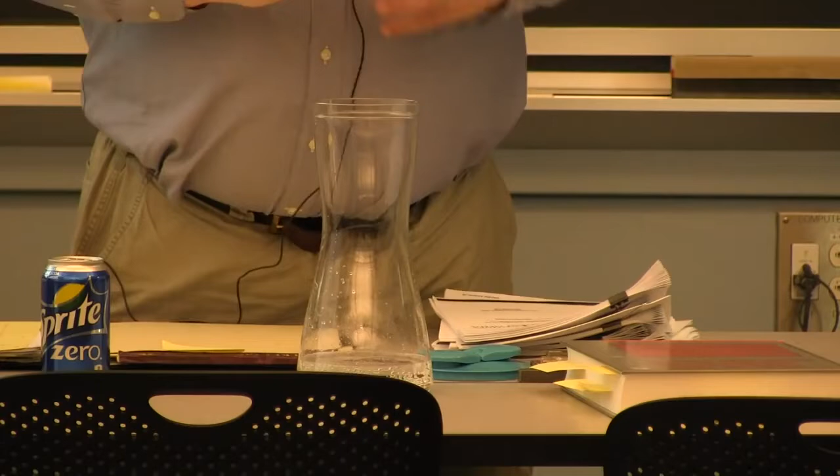Okay, so to start today, I want to take some Sprite Zero. I could have used club soda, but I wanted something that if I pour it in here, you'll see the CO2 evolve. Suds, foam -- well, not really suds, they're foam. And I want you to watch how quickly the gas dissipates.

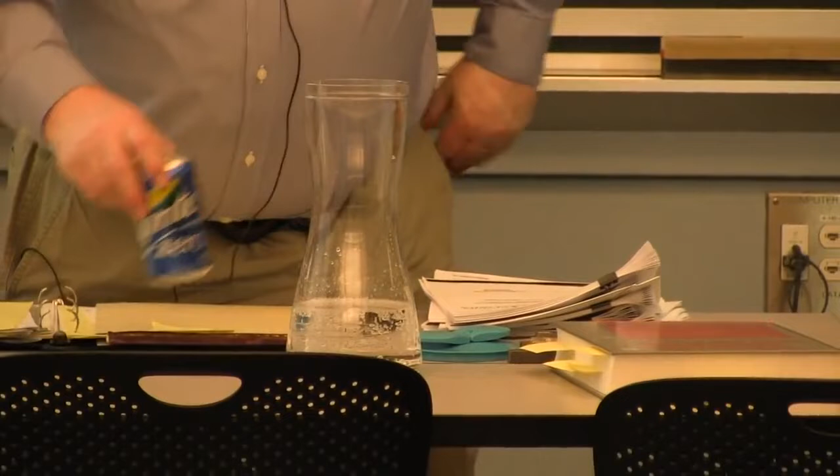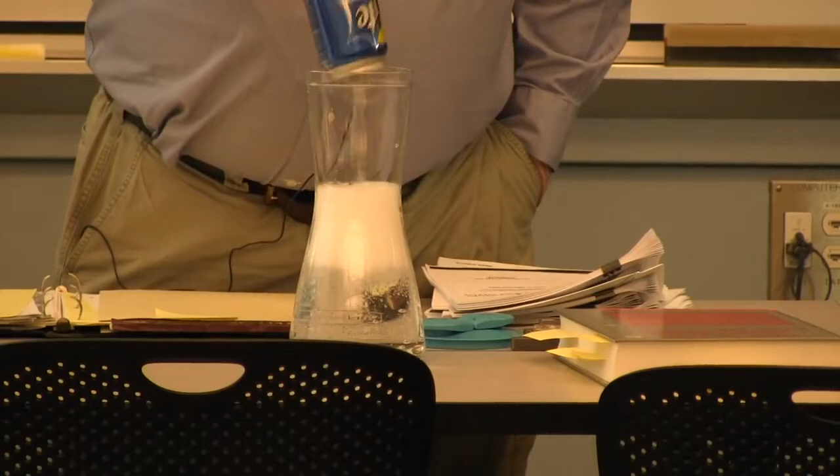We're going to talk about it towards the end of class. This all relates to -- by the way, this is sugar-free, I don't want to spill it all over the table and get everything sticky for the next class -- this relates to the Achilles heel of steel.

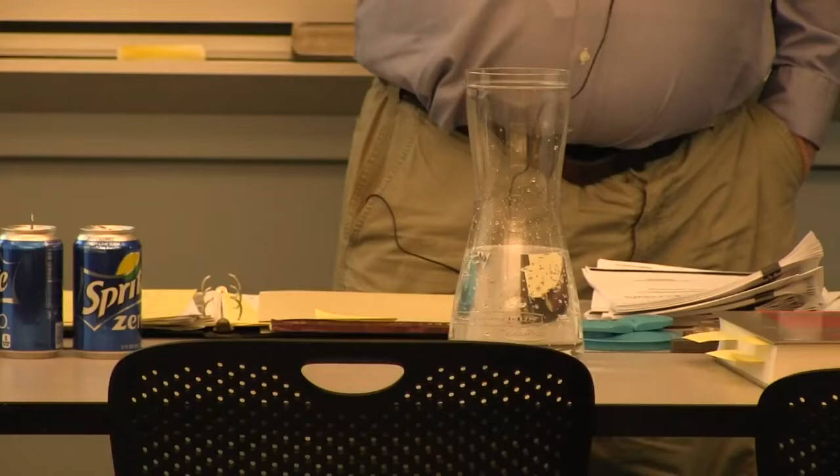See, I don't know if I ever told you the Achilles heel of steel, those of you who took the class last term. Anybody know what it is? It's called hydrogen, okay? And what you just saw, the CO2 coming out of a soda, is time-wise an almost perfect analogy for how fast hydrogen comes out of steel as it solidifies over the next 48 hours.

This will be flat and have no zing to its taste in 48 hours. You saw how fast the CO2 came out and bubbled away, and that's about how fast, once the steel starts to solidify, it's rejecting the hydrogen.

And it continues -- you see some bubbles coming up here, and you'll see them at the end of class, but there'll be fewer. We'll talk about hydrogen, but in processing of steel, there are specifications that say if you introduce hydrogen from welding, electroplating, or any other process, you have to put it in a furnace and bake the hydrogen out within 1 to 4 hours, because if you don't, you could form cracks. The hydrogen can form cracks in the steel under certain conditions.

We're going to talk about that more than you ever wanted to know, at the end of today and tomorrow. But to begin with, I wanted to show you -- you saw the bubbles, and now you continue to see bubbles, but the rate has decreased dramatically.

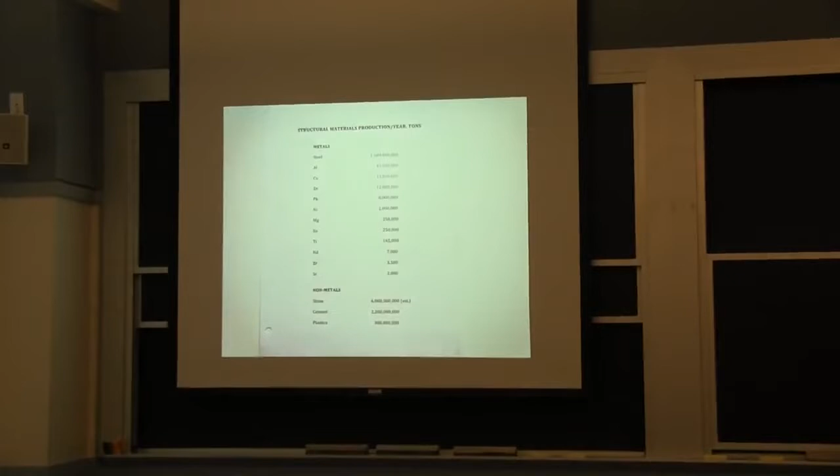Anyone remember the answer? Steels are 95% of all metals made. And if I look at tons produced per year, steel is 1.5 billion tons. The next most common metal is only 45 million tons.

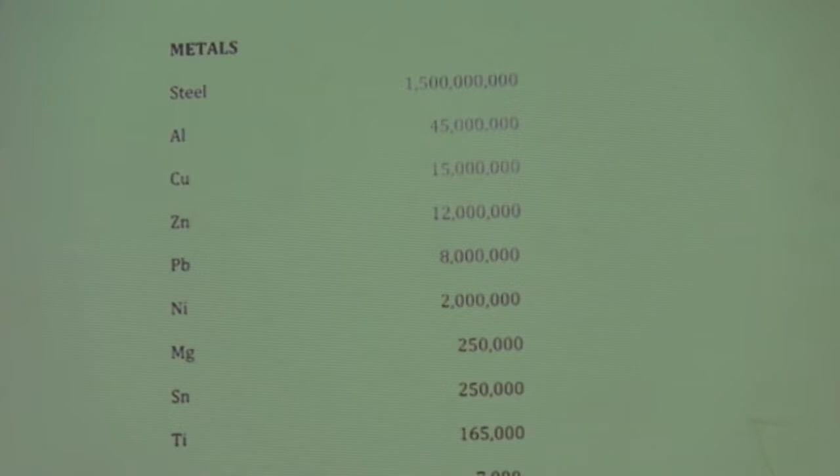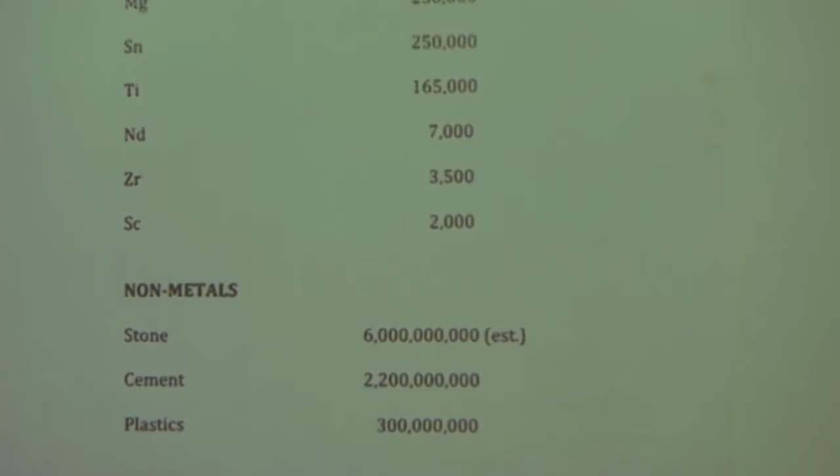If I get to other things, stone is the most - I've estimated at 6 billion tons in the world. Cement as a structural material is about 2.2 billion tons. These two are obviously more than steel. Plastics, all combined, are only 300 million tons. So the plastics industry on a weight basis is 20% of the steel industry.

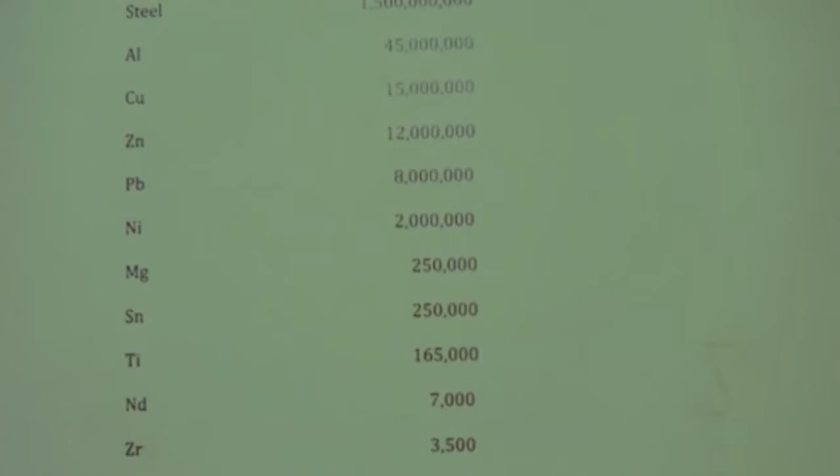So yes, we will talk a fair amount about steel because it's an important material - among structural materials, it's the predominant one. Now you can say, well, what about aluminum in automobiles? Well, they've been making all-aluminum Audis for years, 20 years. They made an all-aluminum Duesenberg in the 1930s, or a Pierce Arrow.

There's a picture I have of J.P. Morgan standing next to his all-aluminum Pierce Arrow. But those were not consumer cars like a Model T. The Ford Taurus is still made out of steel. Yeah, you can buy a $90,000 Audi - it's all made out of aluminum.

And you're soon going to be able to buy a Ford F-150 - not all aluminum, not the frame rails, those are still steel, but the body is going to be aluminum. They haven't announced the price yet; this summer they'll announce it. Anybody want to bet what the price increase will be? Let's say the base F-150 right now is about a $30,000 truck. You can add bells and whistles to get it up to $55,000, but it's a $30,000 vehicle.

Anybody have an idea? Want to guess what the all-aluminum F-150 will cost? I'll bet it's in the $40,000 base price range - it'll add a third to the price. That's my prediction. But it's going to blow away all the other pickup trucks on gas mileage.

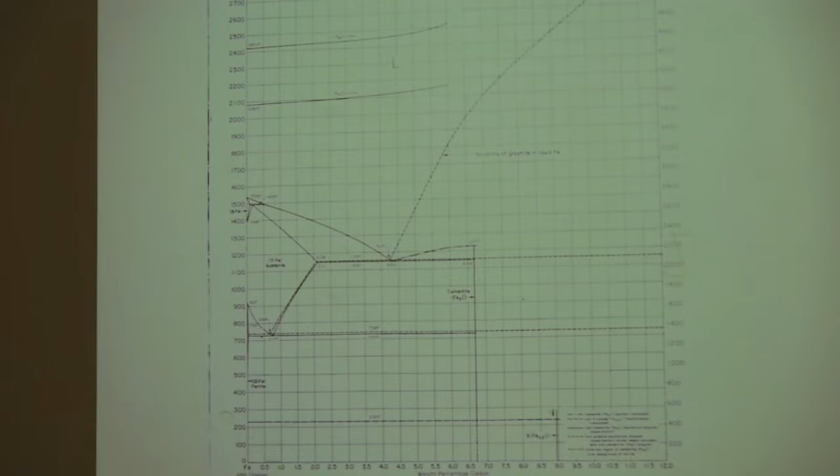I don't know how many of you understand phase diagrams, but you plot temperature versus the amount of carbon in the steel. If you look in the corner, you'll see the name of John Chipman, and our departmental conference room is called the John Chipman Room. John Chipman came to MIT in the late 1930s. He was a physical chemist from Georgia Tech, and he taught people how to make steel with consistent composition, having a tremendous impact on this industry. This phase diagram was evaluated and published by him in '72, when he was 75 years old, though he'd retired in '62.

John and I remember going as a young assistant professor to meet with John Chipman and ask him some questions when he was in his 80s. He was still working on things.

The interesting thing about steel: this is the liquid region at high temperatures above 1530 degrees C. Steels are at less than 1 or 2% carbon, and they have this region called austenite. Cast irons are also on this diagram, above about 2.5% carbon. So the cast irons are here, the steels are over here.

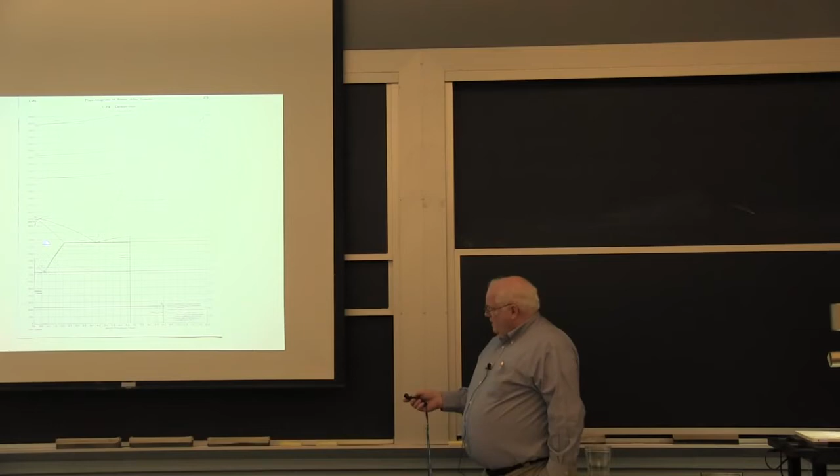One of the things that gives steels a lot of their weldability is that they transform from body center cubic to face center cubic at a temperature somewhere between 723 and 910 degrees centigrade, depending on the carbon content. Because of that solid state transformation, steels can give you very fine grain size, and very fine grain size in most metals gives you very good strength.

So it turns out I can weld two pieces of steel together and just let them solidify without doing anything special, and I'll get 100% joint efficiency. That's not true in many of your other materials, but it is true in steel, and it's true in titanium. Titanium has a phase transformation like this, and a system that gives you a crystal structure phase transformation leading to a refinement of grain size naturally will give you very good joint efficiency.

You go to aluminum, and you're going to see we have some problems getting 100% joint efficiency. What's 100% joint efficiency? You weld the bar together, pull on it, and get the same strength as the base metal. We're going to talk about whether you want the same strength, or what happens if you use undermatching filler metal, so it would always fail in the weld metal. Or do you want overmatching, and how much? It turns out you do want overmatching for good mechanical behavior reasons, but we'll get to that as we go along.

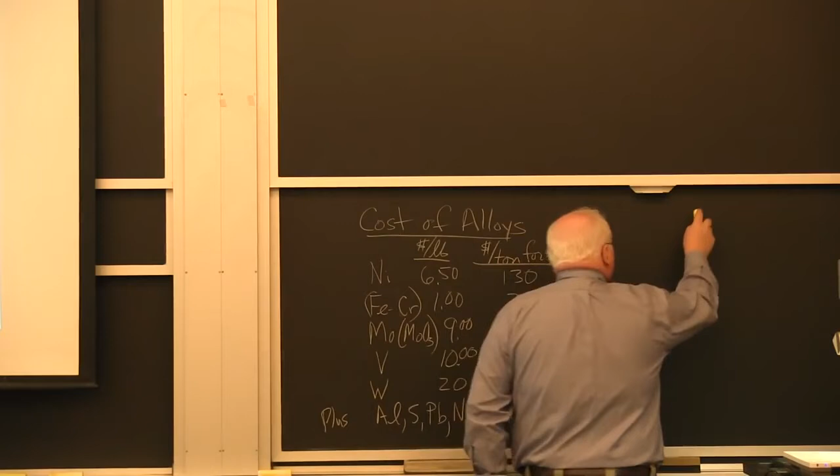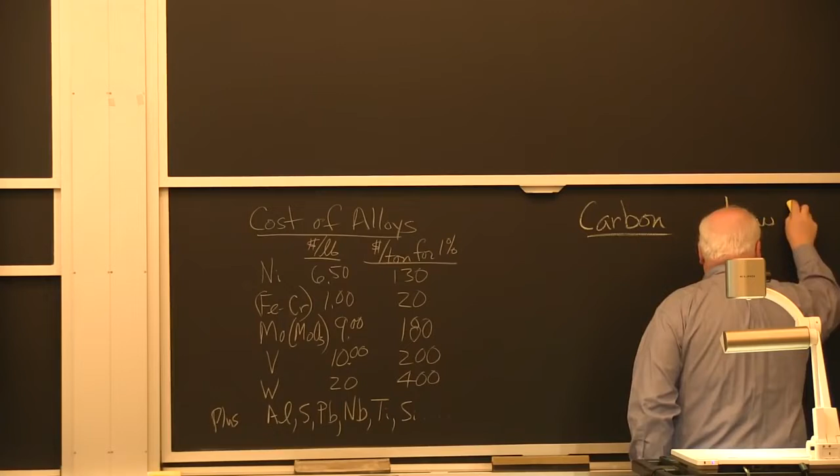This is the iron carbon phase diagram. All steels are based on this, and the steel industry, starting probably 100 years ago or more, divided steels into carbon steels and low alloy steels. Actually, they used to call them alloy steels, but we really call them low alloy now. They also have high alloy steels.

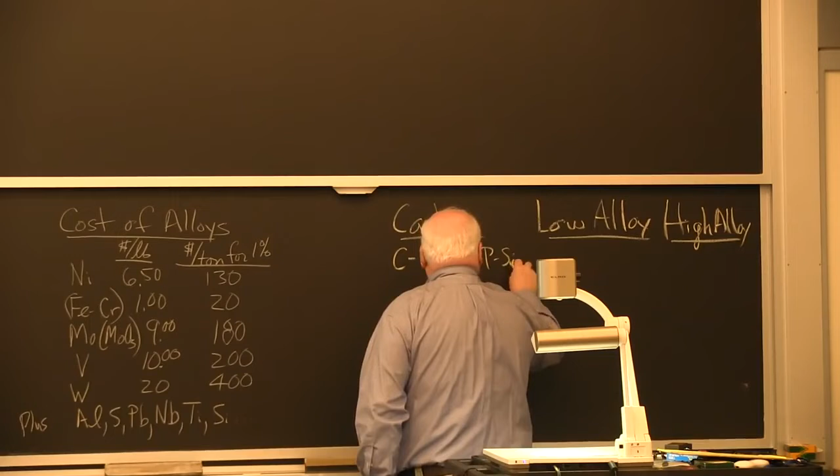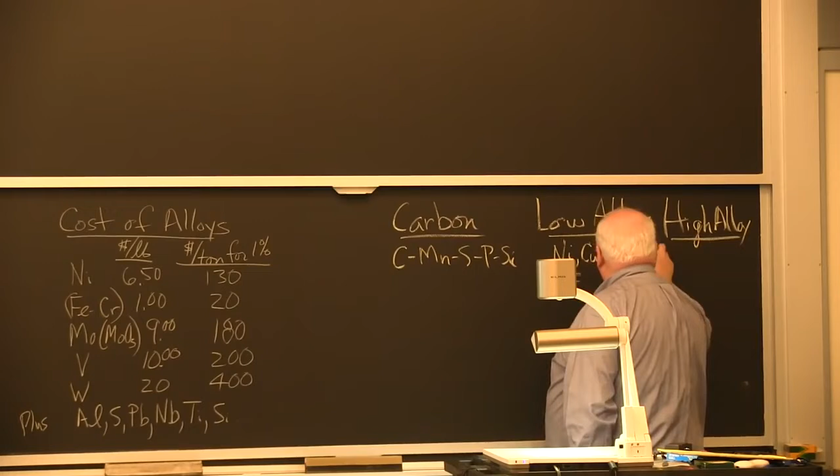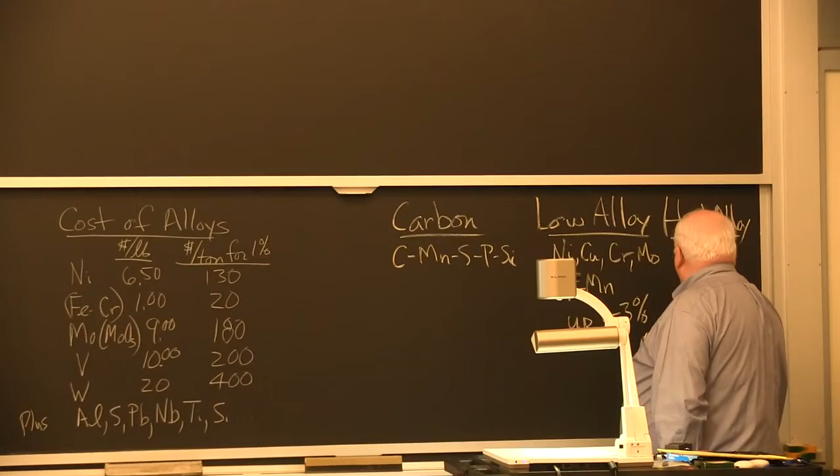Carbon steels contain only carbon, manganese, sulfur, phosphorus, and usually silicon. If they have any of these other things, like nickel, copper, chromium, or molybdenum, or high manganese above about 1.25%, they're called low alloy steels, with alloy content up to 2 to 3%. High alloy steels are greater than 4% typically. If you get high enough alloy, you get steels we don't even call steels anymore - when they're less than 50% iron, we start calling them nickel-based alloys or cobalt-based alloys.

There's an entire system, and when Mike Balforth talks about stainless steels, he'll show you a genealogy of steels similar to what I showed the class last semester.

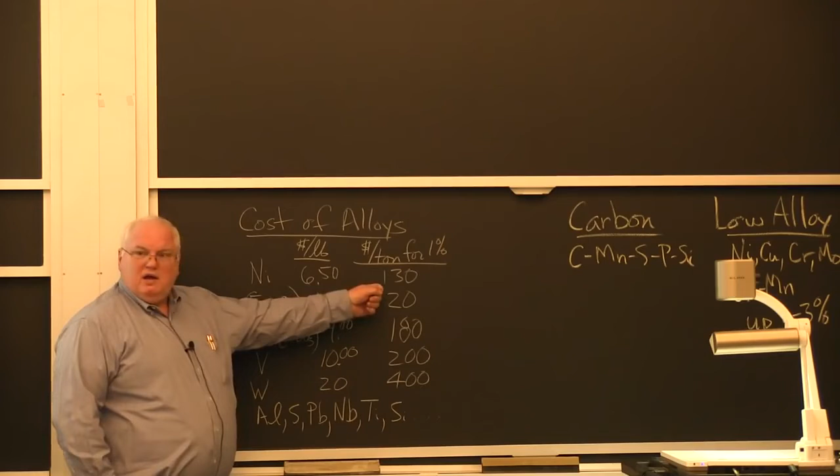Carbon steels historically were dirt cheap. They were priced differently than low alloy steels because it was much more difficult and expensive to make low alloy steels due to the alloy content. How much cost was there? If I add nickel to steel at a 1% level, I'm adding $130 a ton. What's the typical price right now if I went out to buy some carbon steel plate or bar? Anybody know what it costs per ton for a ton of steel, approximately?

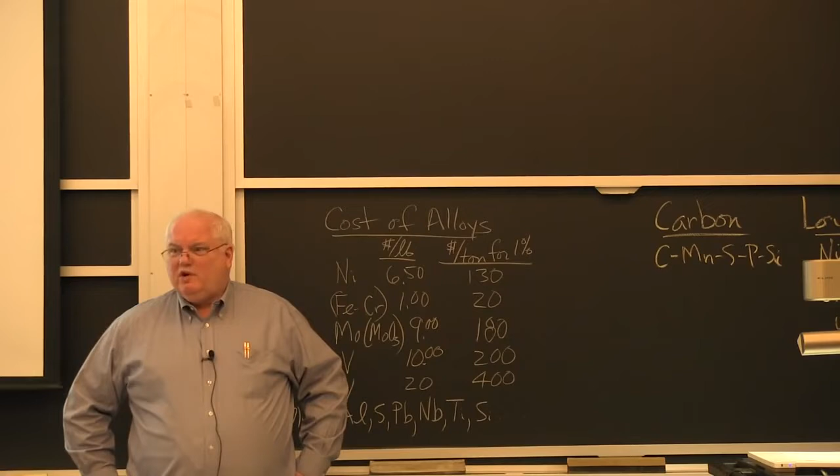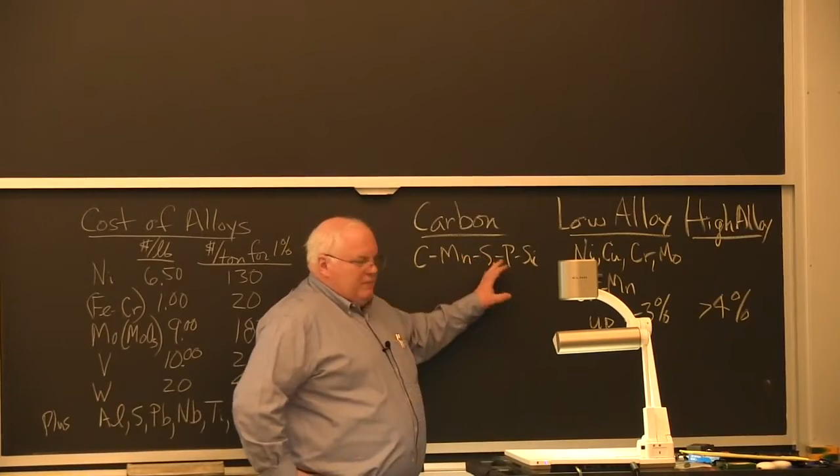If you're buying in low quantities versus if you're General Motors, you're going to be paying $400 a ton, which is about 20 cents a pound. Carbon steels right now, the cheapest bar stock is probably $400 a ton. Reasonably good quality automotive sheet might be $1,000 a ton, so that's 50 cents a pound. If I'm buying 100,000 tons, like General Electric Appliance Park where they make washing machines and refrigerators, or General Motors, they're going to negotiate prices of $400 to $1,000 a ton.

If you're talking low alloy steels, the prices can be anywhere from $800 a ton all the way up to $10,000 a ton or more. If I'm talking high alloys, you're in the $4 a pound range, or $8,000 a ton. But if you get to the nickel-based alloys, the high nickel alloys, you could be paying $30,000 or $40,000 a ton. We build nuclear reactors out of these things, out of great big thick plate, but it's not cheap.

Nuclear reactors cost - right now, what's the cost of building one? Well, you can't do it because the environmentalists will take you to court for 10 years. But if you could build a nuclear reactor, what would one cost? You're a nuclear physicist - 4 billion? 10 billion is a good number. I'm not sure, 4 billion. You'd need a very friendly country to build in. You could build one for 4 billion.

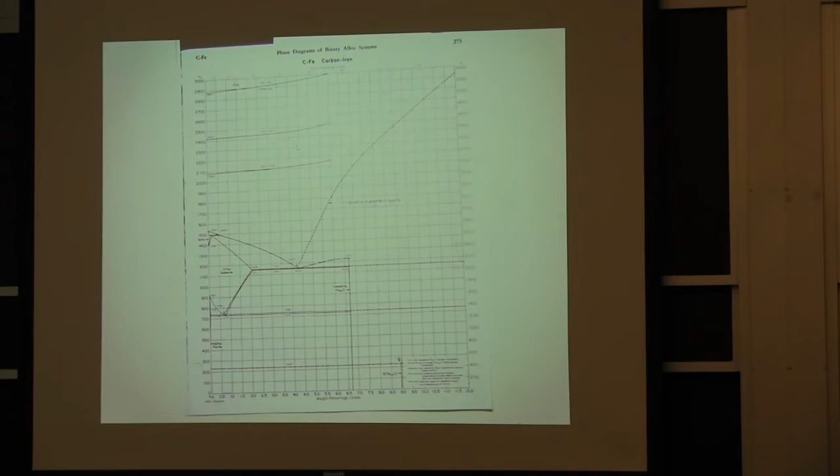That's because the steel can transform at high temperatures to this face-centered cubic austenite phase, and if you quench it, you can get a metastable phase, which is not this body-centered cubic ferrite, but something called martensite. And martensite's as hard as a file, a steel file.

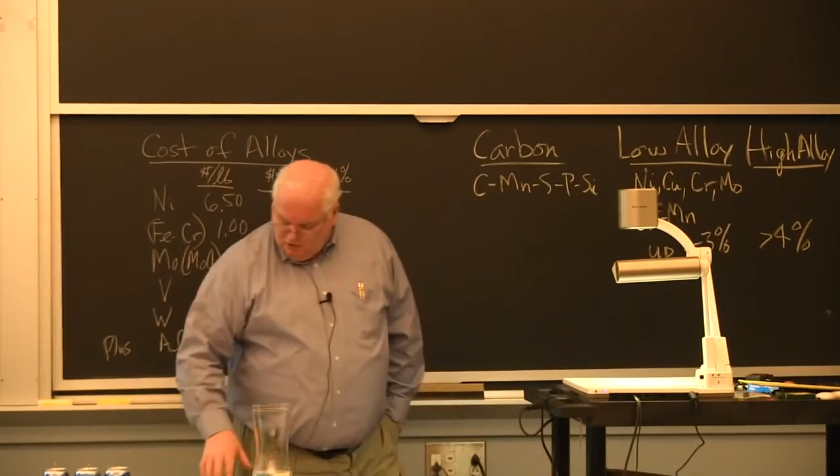So you like to have something that can be hardened. There are other alloy systems that can be hardened - aluminum, we're going to talk about aluminum, but aluminum is precipitation hardened. You heat it up and cool it down, or you quench it. You heat it up, solutionize everything, quench it, and then bring it up to an intermediate temperature - we call it aging - and you get little precipitates.

And some people will tell you that's nanotechnology. Well, the Wright brothers used nanotechnology in their engine at Kitty Hawk. It was an aluminum copper alloy that had been precipitation hardened - aluminum for lightweight, because it's an aircraft, and precipitation hardening so it had decent wear resistance. And it's still sitting in the Smithsonian today.

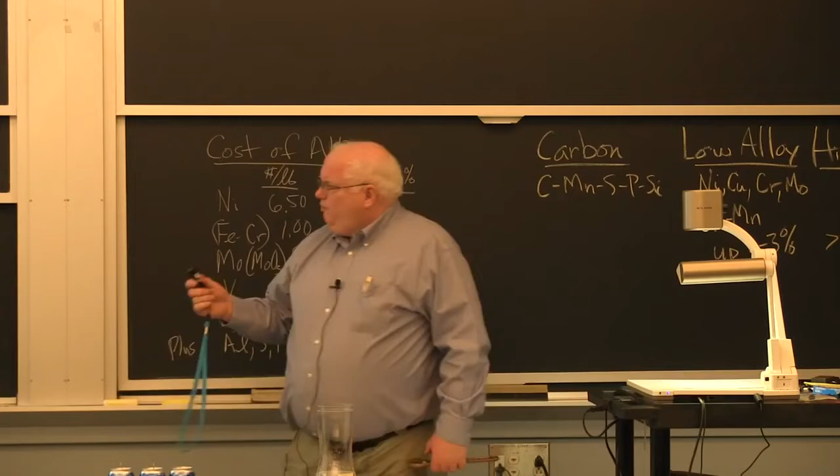Cast iron is more than 2 or 2.5% carbon - more than carbon steel - because cast iron is a eutectic. If I look at the melting point here, cast iron, you'd like to have something that is low melting to make it easy to cast.

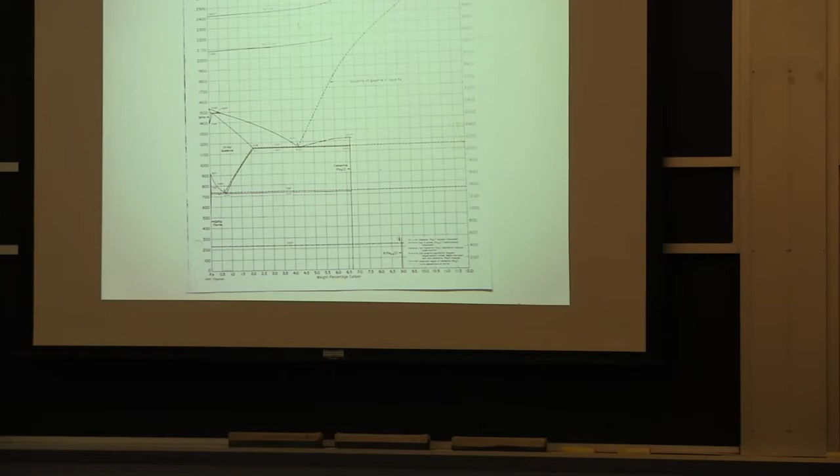Historically they call it cast iron because if you took iron ore, where you didn't necessarily want carbon, you would mix iron ore with coal, or originally, up at Saugus Iron Works, they mixed it with charcoal, which is carbon, just a wood source of carbon. And when you do that and try to melt it,

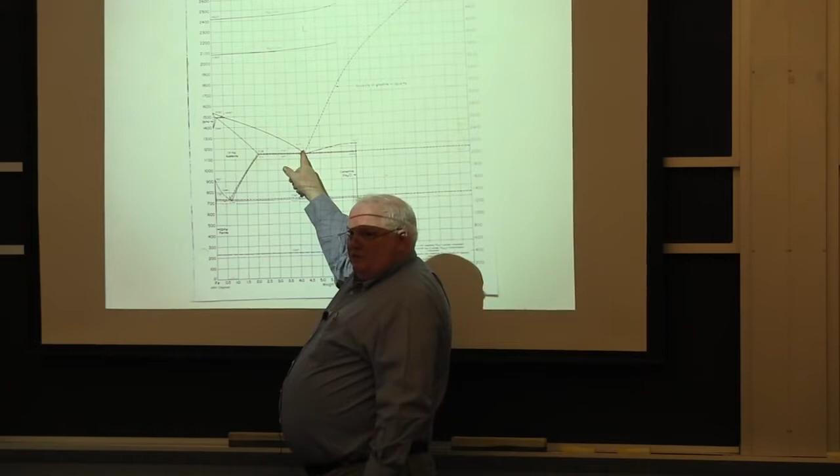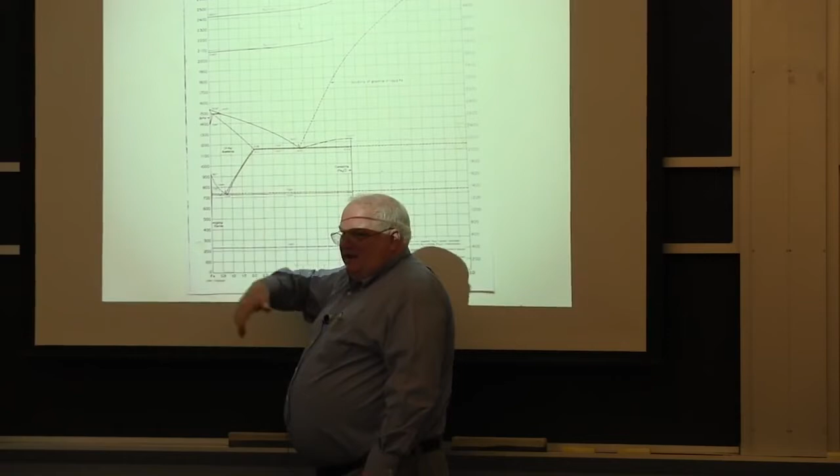the carbon will alloy with the steel and form cast iron. So in the 1600s, they didn't have the phase diagram, but it was cast iron that melted at a low temperature. They then could take that cast iron and beat it, forge it, heat it up. That's the blacksmith folding it over and making swords and stuff. As he did that, the carbon would burn off the surface. If he did it enough, burned off enough carbon, he would get something even more malleable, more ductile, that was wrought iron rather than cast iron, because he had wrought it on the forge. And if he did it long enough and didn't oxidize it all the way to nothing, he would end up with steel.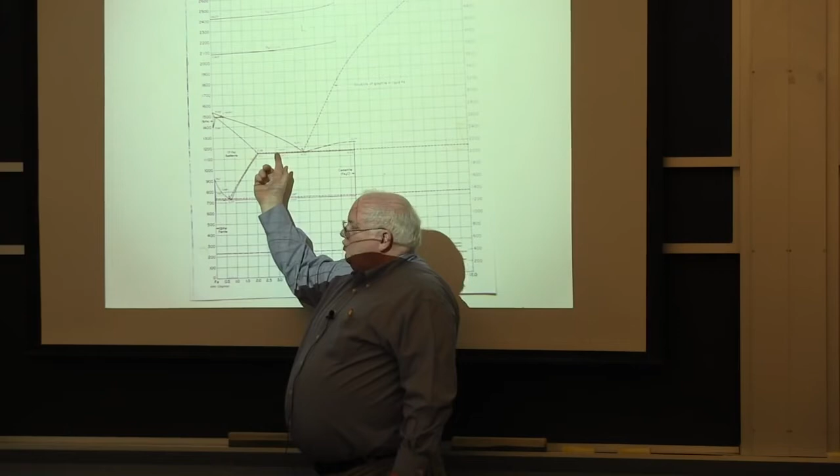So historically, they would take iron ore, reduce it with carbon, and end up with cast iron. Then they would sort of work their way back across the diagram, and if they're lucky, they could end up with little bits of steel, which were tremendously expensive - all that work that went into things.

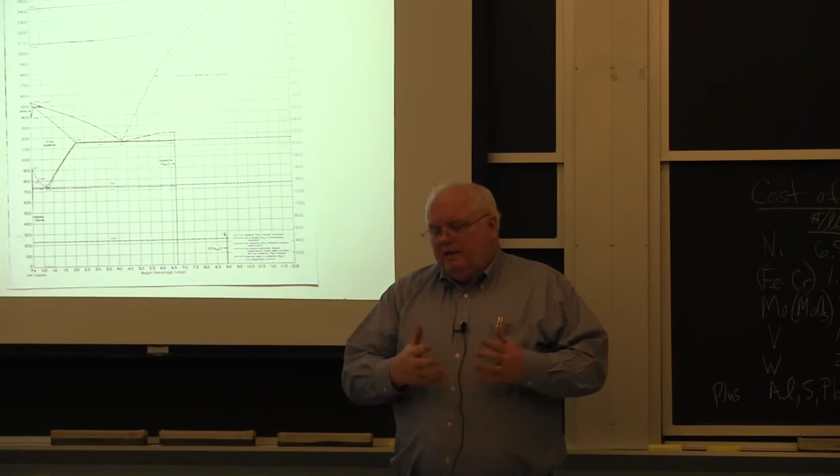I've estimated the person-hours per ton in the 1600s was about 2,000, maybe 3,000 person-hours per ton of cast iron or wrought iron. Well today it's about 20 minutes a ton. Look at that productivity gain.

And what was the big productivity gain? It was 1856 - Sir Henry Bessemer taught us how to build a vessel so we could burn the carbon out of the cast iron more efficiently without oxidizing all the iron back to the ore. That was the beginning of the Steel Age in 1856.

And who was the Bill Gates of his day, the richest man in the world? Carnegie, Andrew Carnegie. In his day, he was richer than Bill Gates or Warren Buffett, on a proportional scale. And it was all because of the railroads and steel.

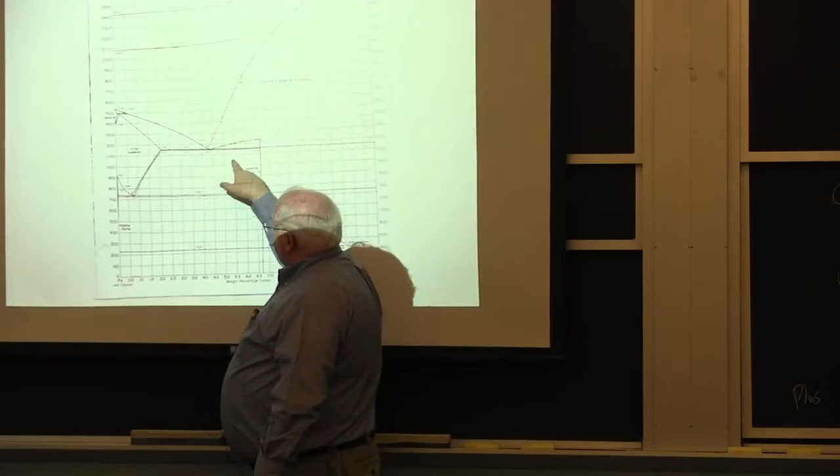So there are certain things that came along, but the reason it's called cast iron is because that's how it was made originally. You take charcoal and iron ore, reduce it, and you end up with cast iron, which is right here on the diagram. All the cast irons are somewhere around this, about 4.3 or something. But you can have cast irons down here, you can have cast irons up here. You don't go above 5 or 6% carbon in cast iron because you run into other problems.

To tell you how it happened - in the United States we had some iron ores that were very low in phosphorus, so we could make good steel. In Czechoslovakia, a lot of the Europeans, the Czechoslovakians, were some of the best steel makers in Europe. But the Czechoslovakian iron ore had a lot of phosphorus and sulfur in it, and they couldn't get consistent results. It wasn't until John Chipman came along in the 1940s that really taught people how to get consistent results.

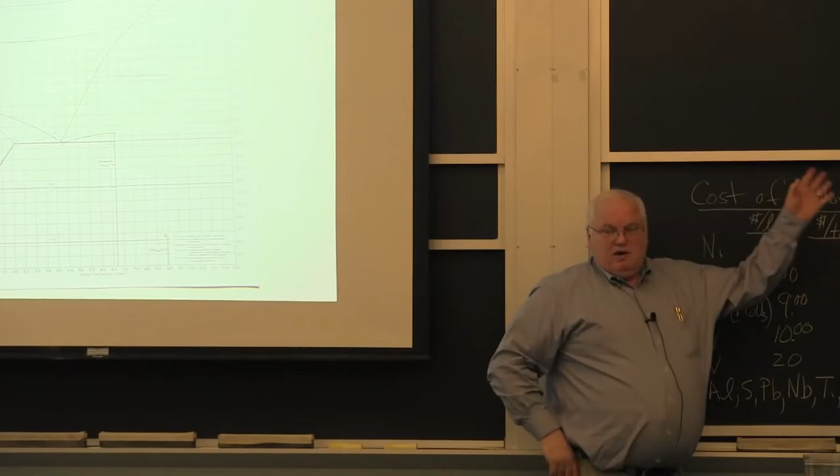But you don't just take iron and carbon and put them together. You put them together with a flux, and that flux might be limestone, or calcium silicate, which geologists call wollastonite, just a rock. They might throw sand in there too. So they throw these different things into the steel when they're making the cast iron, which you're then going to turn and burn the carbon off to make steel out of.

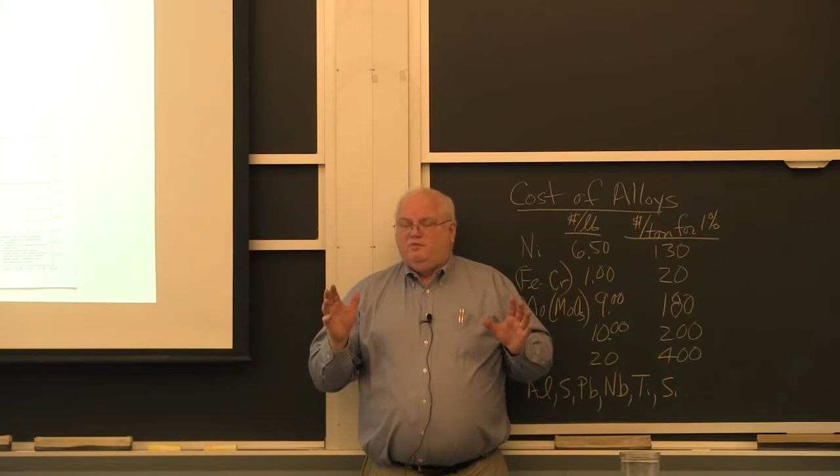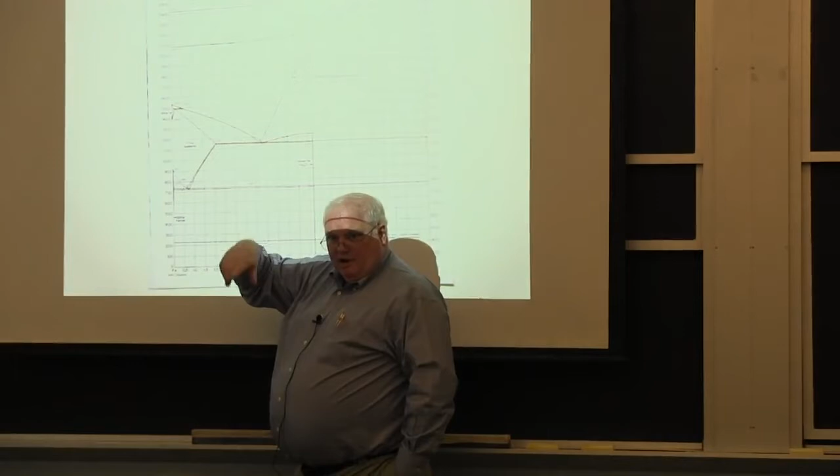But if you have very much silicon, or very much sulfur, you've got a real problem. Because if I had the iron-carbon or iron-sulfur diagram, the iron-sulfur diagram has a really deep eutectic with the sulfur. Remember, sulfur is right underneath oxygen on the periodic table. Here's your eutectic with carbon - the eutectic with sulfur is an even deeper eutectic, below the hot working temperature where you're going to forge that steel.

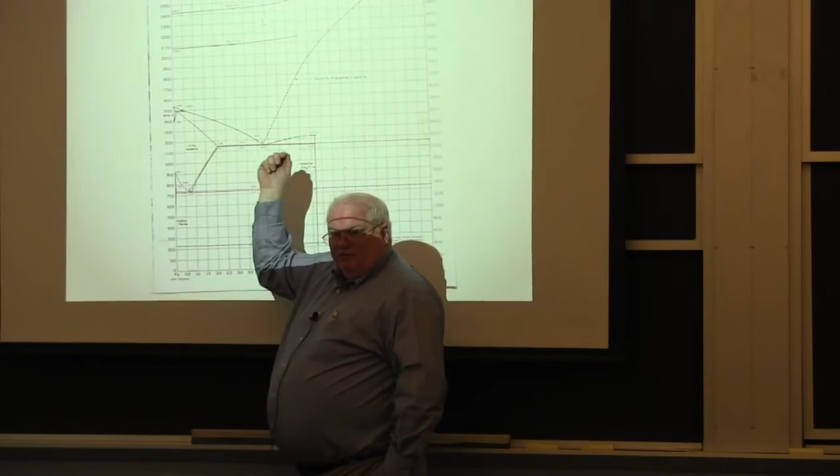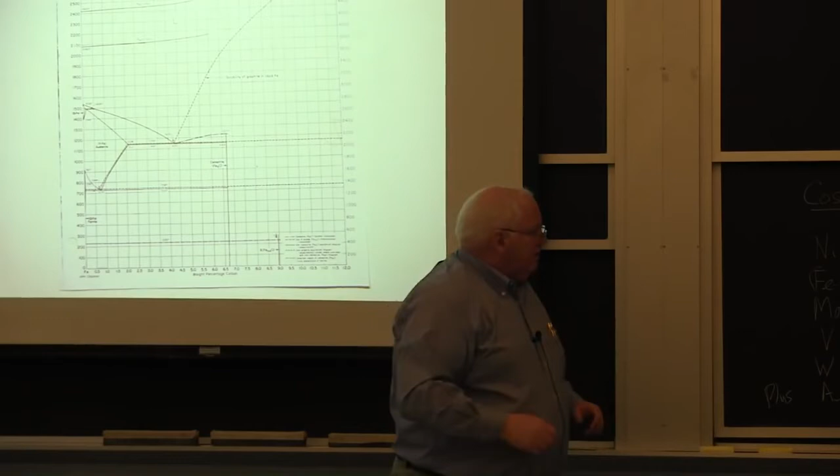And so you'd form liquid iron sulfides on the grain boundaries, and they call it hot shortness or hot tearing. When you try to roll or forge the steel, it just crumples into pieces because of the liquid iron sulfide. Someone learned if you throw some manganese in, it forms stable manganese sulfides that melt above the melting point of steel. So manganese is merely a way to tie up the sulfur impurity that comes from your coal.

And then they had problems with phosphorus, and they had to learn to use what they call basic refractories, like calcium-containing refractories. There's acidic, which is - I hate these terms, but people were chemists back then, and they knew acids and bases. The silica-based slags were considered acid, and the basic slags were based on calcium or magnesium, like calcium hydroxide, magnesium hydroxide. Silica would tend to form acidic mixtures with things. They make no sense to me today, but they made sense to the people who were basically working with chemists working with water-based systems back then.

I went back to a 50-year-old book on welding metallurgy, written in the mid-60s, and he didn't even list the basic oxygen process, which is how all steel's made today, because it didn't come into being until like the 1970s. But even back then, if you read specifications, even today, it says it can be made by the acid process or the basic process. That's just a question of, you've got iron and carbon, and what is your other constituent? Your slag is made out of wollastonite or sand, or a bunch of these things, but what's the composition of it?

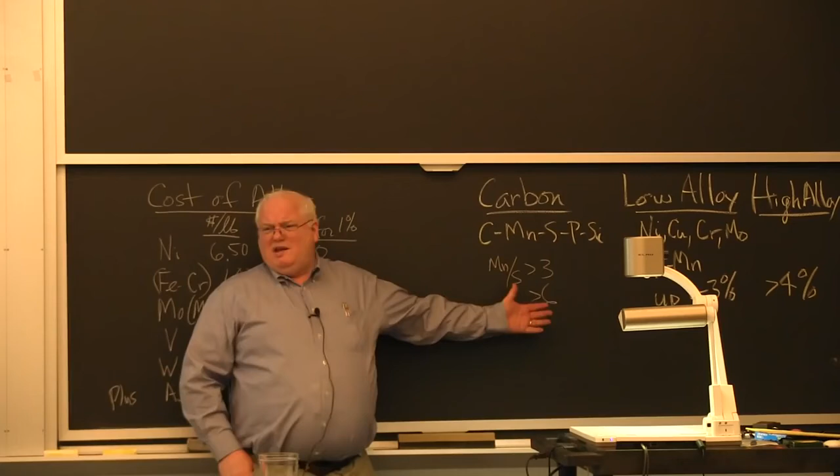In the old days, like before World War II, there would be a rule when you're welding that your manganese-sulfur ratio had to be greater than about 3, and preferably greater than 6. You had to have enough manganese so you didn't get this iron sulfide intermetallic in your weld metal and have the weld break in two as it cools down from cooling shrinkage stresses and stuff. We don't worry about that anymore - no one has sulfur that high anymore.

Back, if I go look at an ASTM spec that was originally written in the 1920s or 1930s, it will say the sulfur must be less than 0.05%. So that's, let's say, 1920s. By the 1940s, they were saying the sulfur must be less than 0.04%. By 1975, when Tom Eagar was working for a steel company, the sulfur was typically less than 0.01%, and the Japanese were making it at 0.005%.

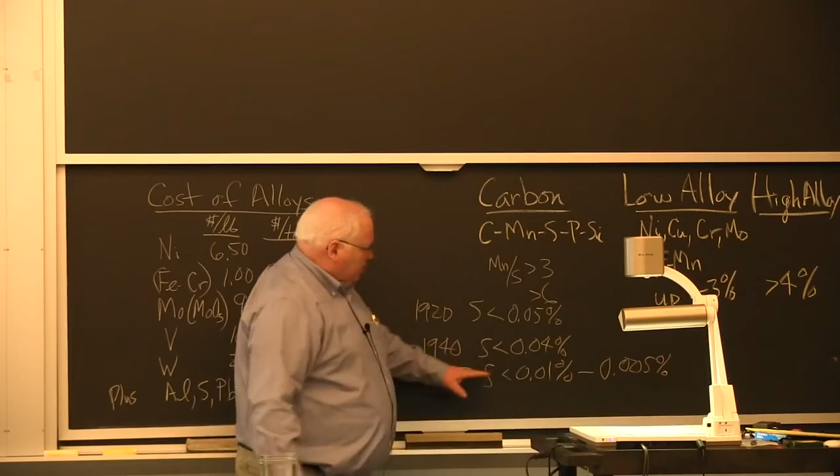They had modern equipment, and they were beating our socks off in quality of steel. So you want to have the sulfur very low in almost every case.

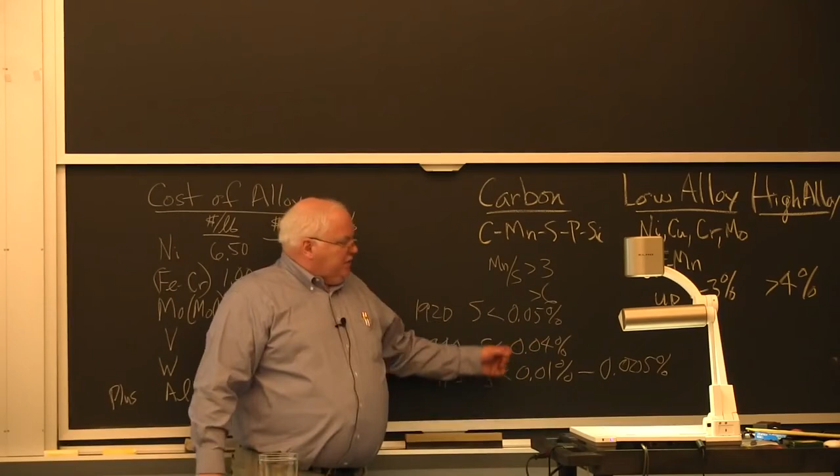0.05%, 500 parts per million, was about the best they could do in the 1920s with any regularity. They didn't know how to control it until John Chipman told them what types of slags and stuff to use. By the 1940s, you'll see 0.04. I can go to an ASTM spec and look at it, and they'll still say today the sulfur has to be less than 0.05. Are you kidding me? No one makes a 0.05 steel anymore - they haven't made it since before 1950.

They got to this, and then they were getting to very low sulfur. Sulfur does a lot of bad things for toughness and other things in the steel, but we've learned how to make it better and better. We can regularly get down to 0.002 or 0.001 sulfur today if we want, but we don't usually need to.

Yes, I think it'd be nice to talk a little more about the slag, because you mentioned it a few times, and I know it's an ionic phase. Right, lower densities, it's on top, at very high temperatures, you're close to equilibrium, but I'm not sure that everyone here... yeah, okay.

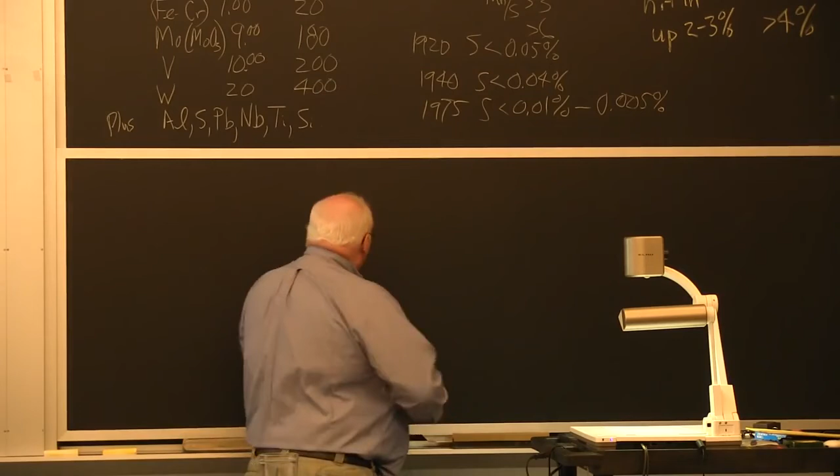If you go up to Saugus Iron Works, they've got this big shaft furnace, and it's actually built on a hill. So this is the grade of the hill, and this is about 15 feet above the bottom down here.

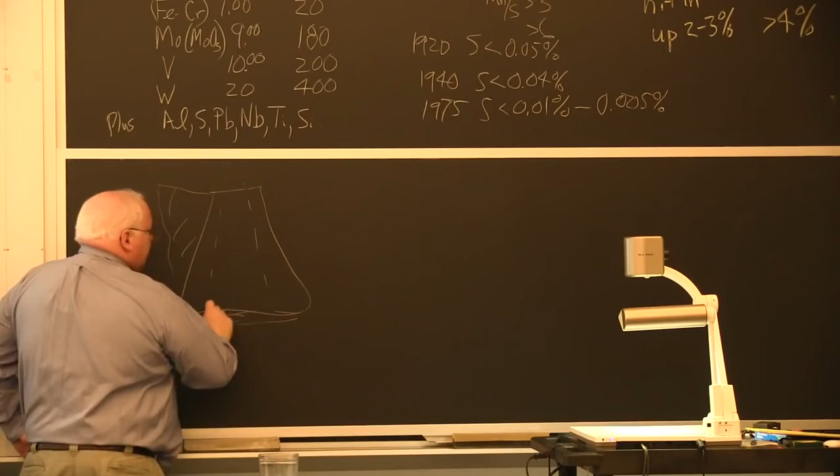And they would pour in charcoal, iron ore, mostly Fe2O3. They basically got it out of the bogs here on the seacoast. They'd go out there and add sand or limestone. Limestone is calcium carbonate, if you will. It could be magnesium carbonate. This is basically silica. It could have some manganese oxide, some titanium dioxide. It could have lots of things in it, in the sand, depending on what you got.

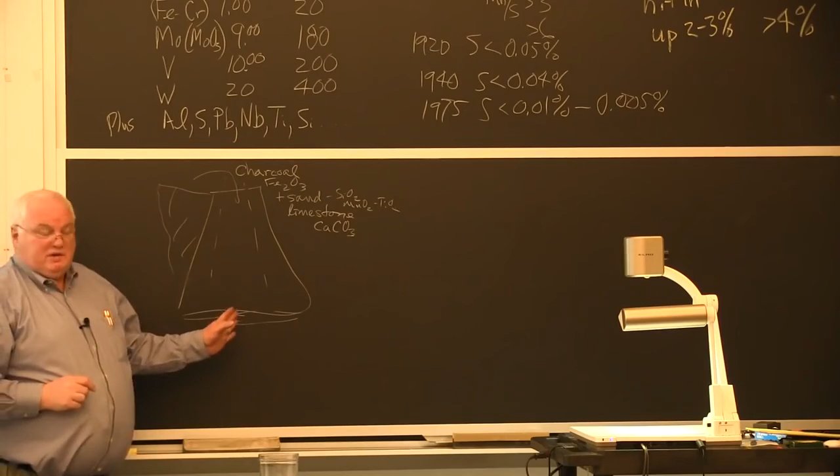You throw these things in the top of this shaft furnace, they used to call them, they still call them blast furnaces, and they blow the air in here. They have great big bellows down here, and a water wheel pumping this bellows and blowing air in, and you're burning up the carbon, the charcoal, generating heat. It's really hot down here. It's cool here because you're dropping the stuff in, and the particles, you have a particle bed reactor here. You're sending CO2, or actually carbon monoxide, up the stack, and down here you'll generate on a hearth of sand some cast iron.

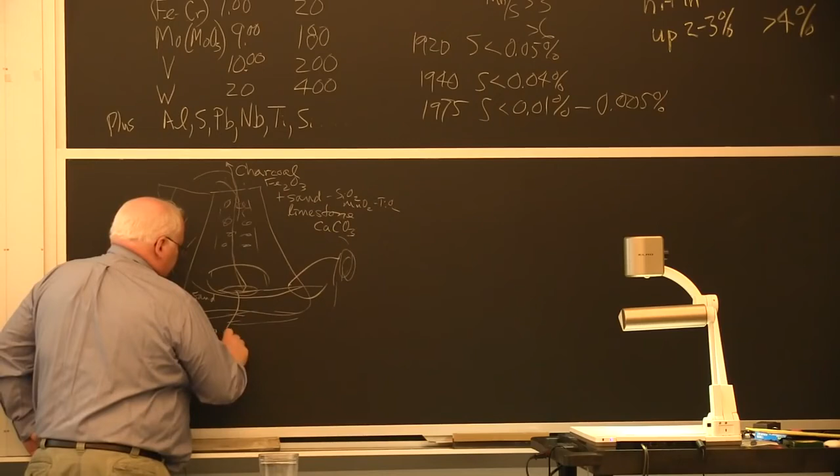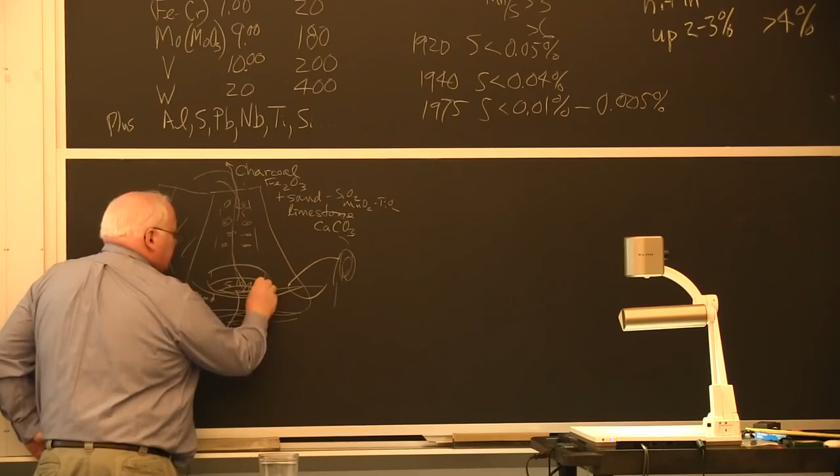Now, this cast iron will also have a slag on top that forms, and it's basically a molten glass, a calcium silicate molten glass. If you pour it out on the ground, you can hit it with a hammer after it cools off and it shatters like glass. In fact, you can find obsidian, a natural glass formed from volcanoes, and it's basically just a bunch of melted sand, and this becomes the slag.

And the slag is where you want your impurities to go. Some of the sulfur will go up the stack, some of the phosphorus will go up the stack, but a lot of it gets trapped in this molten glass. So now it's a calcium silicon phosphoric acid glass, or it's got sulfates in there. It's just a complex liquid ceramic mess.

People in this part of the country could make really good steel because they had really good raw materials. They didn't even know what made them good. People in Czechoslovakia had to deal with all this high phosphorus ore, and they were beating their heads against the wall until someone figured out, oh, let's throw some manganese ore in here. We get better results, and it doesn't crack when we start to forge it and everything.

Is that kind of what you wanted? Yeah, okay, that helps them understand some of that.

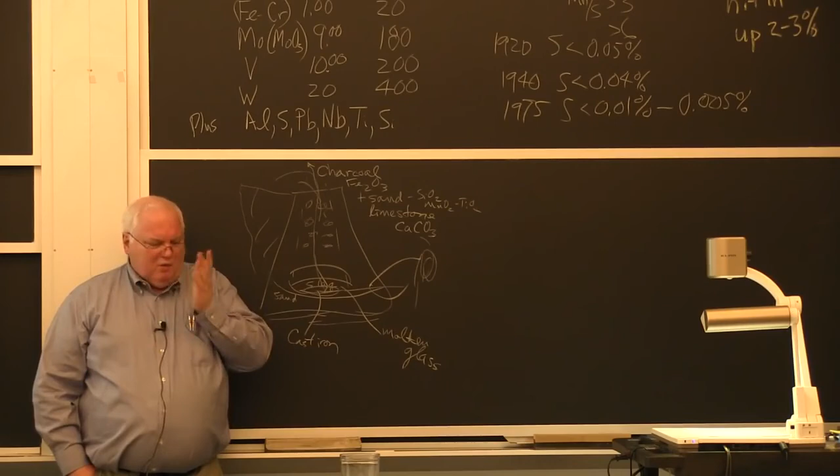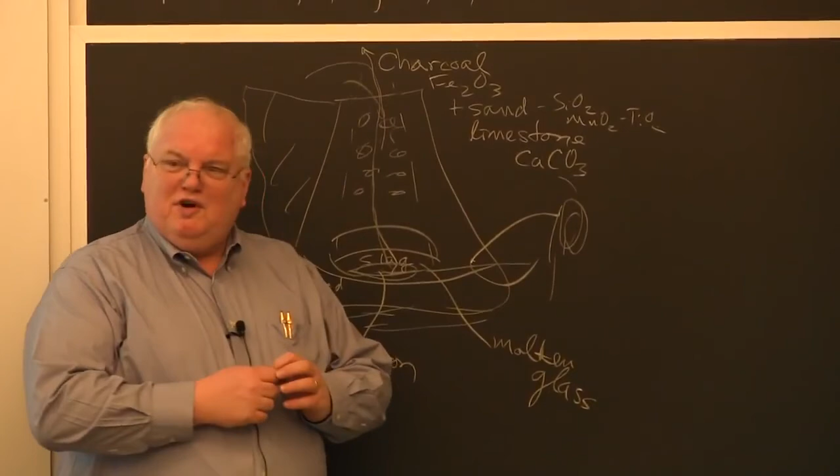So I don't want to go too far on all of that, but I do want to tell the story of - you've heard of pig iron? Does anyone know how the term pig iron came to be?

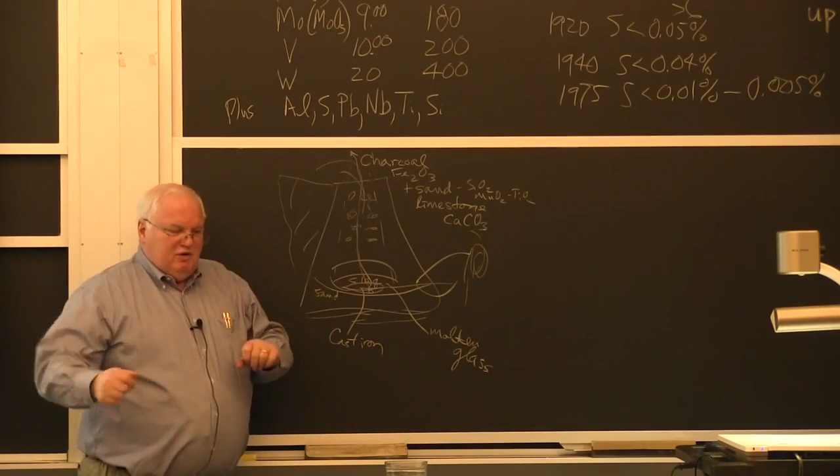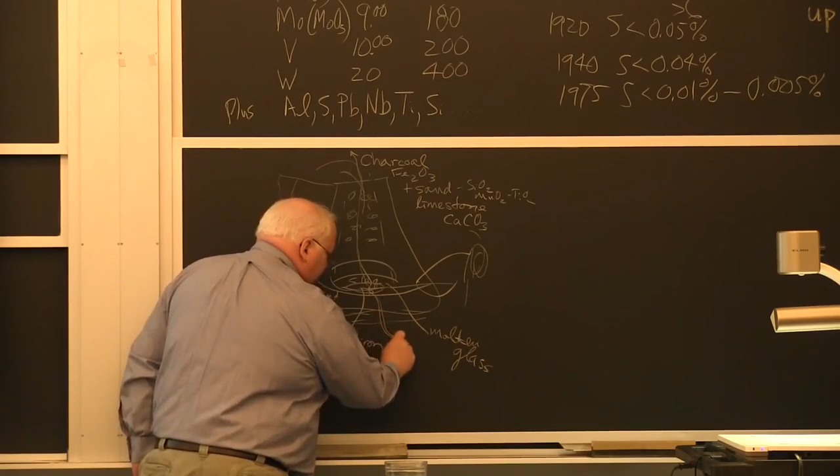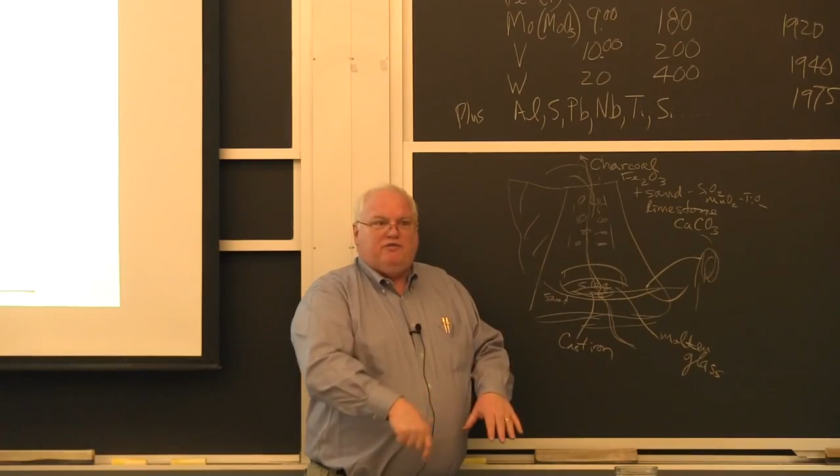So every now and then, about once a day, you would tap the bottom of the furnace. You would have a little clay plug around this sand hearth, and you would go in with some steel rods and poke away that clay plug, allowing the liquid metal to flow out of the furnace. If you go up to Saugus, you see the floor around the caster was basically just about 2 feet of sand, and they would dig a little trough in the sandy floor for the liquid metal to flow out through.

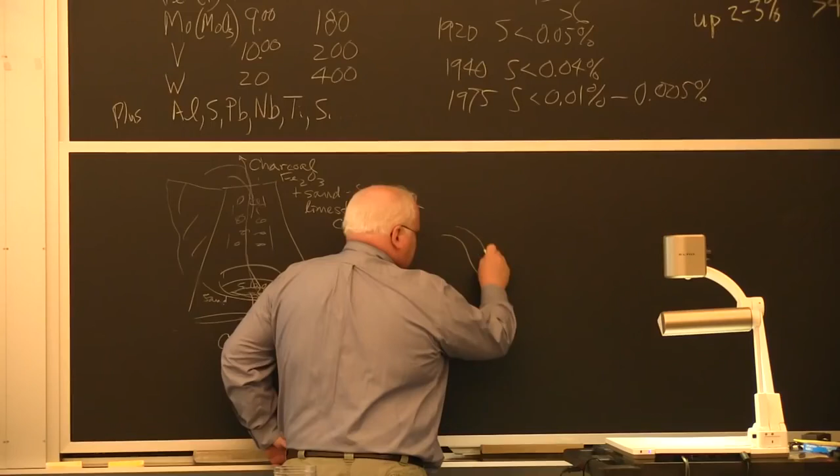So if it's coming out of a trough out of the furnace that looks like this, they would then flow it into what you'd call a manifold, and off the manifold they would have little castings like this. So the metal would come and solidify on the sand floor. They've dug this stuff in the sand - it's like people at the beach playing in the sand, right? And these were the pigs.

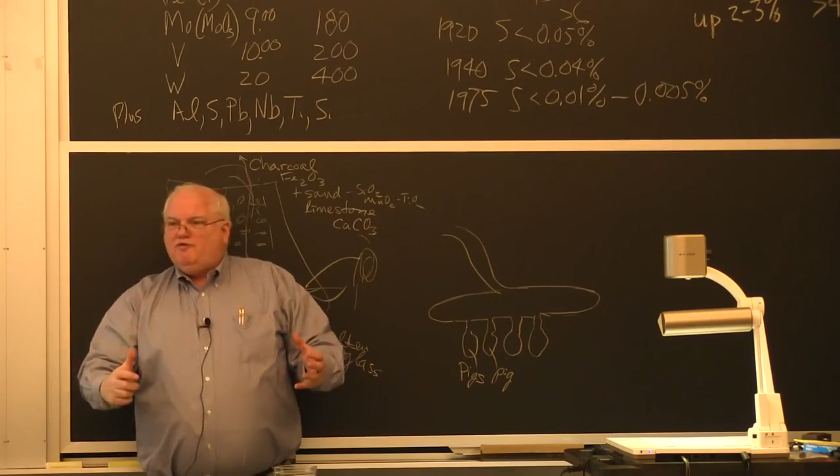And it's called pig iron. They would make little castings, maybe a 40 or 50-pound casting like this. It's a piece of pig iron.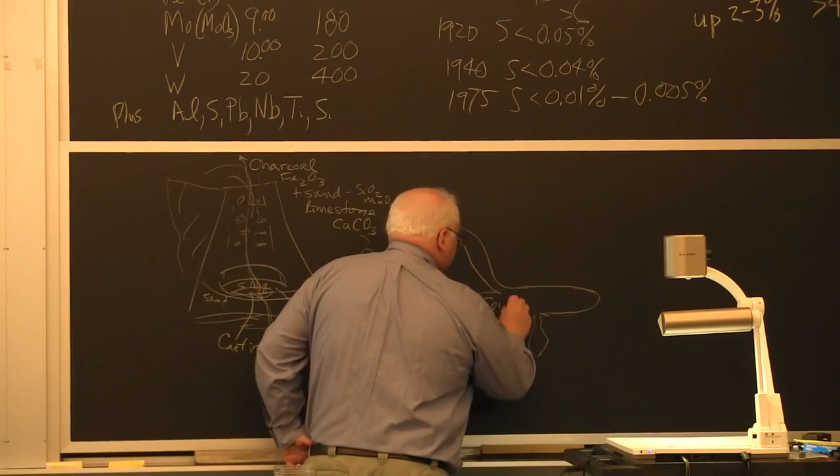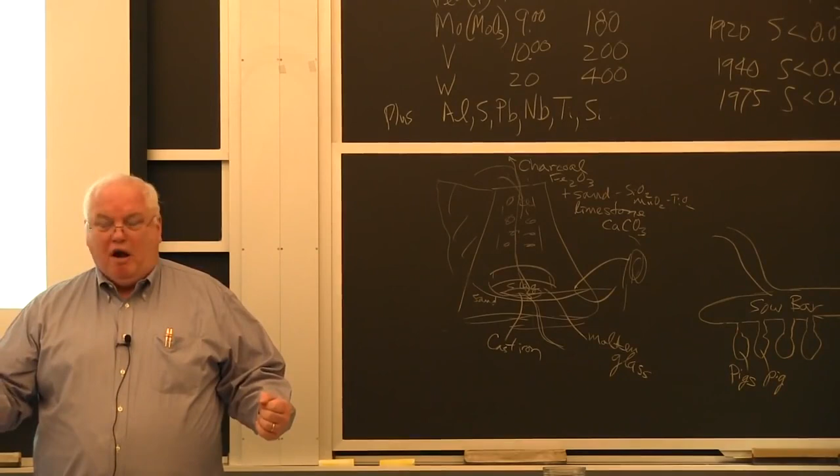And this bar, anybody know what this bar is called? It's called the sow bar. What's a sow? A mother pig - those are the piglets nursing off of the sow bar. The sow bar might weigh 400 or 500 pounds. If I'm going to make a cannon, I use the sow bar to forge the cannon from, and I've got to have...